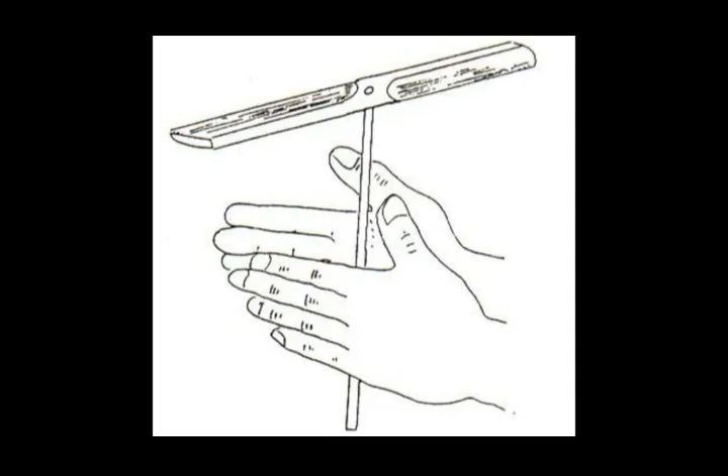Some kites in China and Japan were capable of carrying a man into the air. The ancient Chinese also flew small hot air lanterns and bamboo copter toys with spinning rotors. Leonardo da Vinci's 15th century dream of flight found expression in several rational but unscientific designs, though he did not attempt to construct any of them.

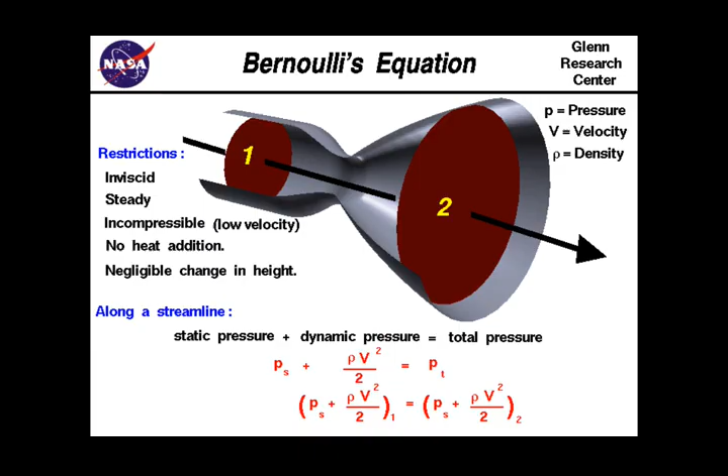The discovery of hydrogen gas in the 18th century led to the invention of the hydrogen balloon, at almost exactly the same time that the Montgolfier brothers discovered the hot air balloon and began manned flights. Various theories in mechanics by physicists during the same time period, notably fluid dynamics and Newton's law of motion, led to the foundation of modern aerodynamics, most notably by Sir George Cayley.

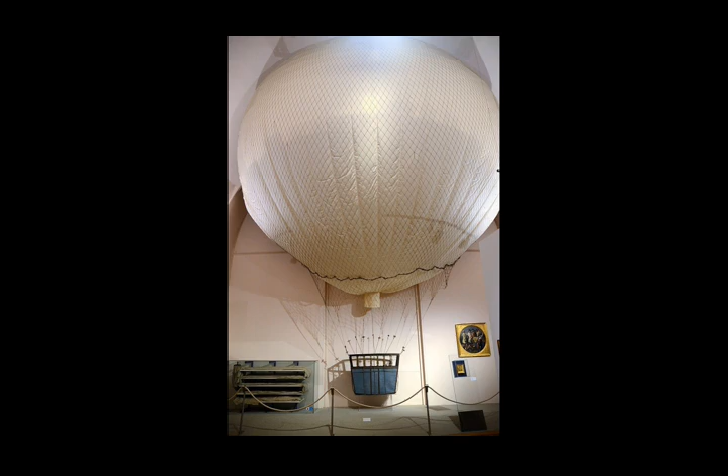Balloons, both free-flying and tethered, began to be used for military purposes from the end of the 18th century, with the French government establishing balloon companies during the Revolution. The term aviation, noun of action, from stem of Latin avis, bird, was coined in 1863 by French pioneer Guillaume Joseph Gabriel de la Landelle, 1812 to 1886, en navigation aérienne.

Experiments with gliders provided the groundwork for heavier-than-air craft, and by the early 20th century, advances in engine technology and aerodynamics made controlled powered flights possible for the first time. The modern airplane, with its characteristic tail, was established by 1909, and from then on, the history of the aeroplane became tied to the development of more and more powerful engines.

The first great ships of the air were the rigid dirigible balloons pioneered by Zeppelin, which soon became synonymous with airships and dominated long-distance flights until the 1930s, when large flying boats became popular. After World War II, the flying boats were in their turn replaced by land planes, and the new and immensely powerful jet engine revolutionized both air travel and military aviation.

In the latter part of the 20th century, the advent of digital electronics produced great advances in flight instrumentation and fly-by-wire systems. The 21st century saw the large-scale use of pilotless drones for military, civilian, and leisure use.

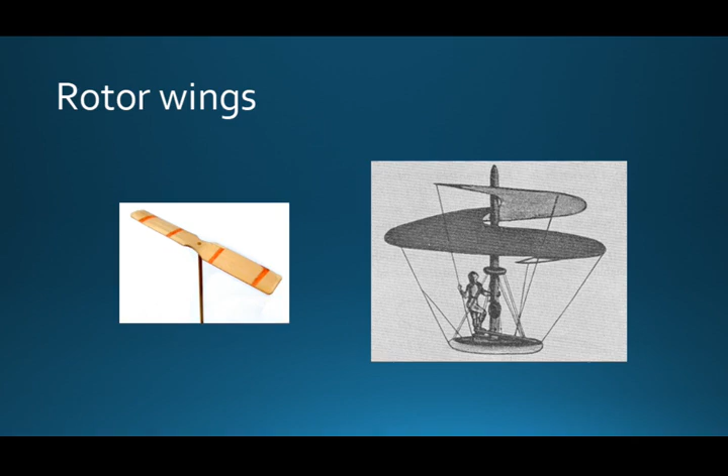The similar moulinet à noix, rotor on a nut, appeared in Europe in the 14th century AD.

Hot air balloons. A sky lantern. From ancient Chinese times, they have understood that hot air rises and have applied the principle to a type of small hot air balloon called the sky lantern. A sky lantern consists of a paper balloon under or just inside which a small lamp is placed. Sky lanterns are traditionally launched for pleasure and during festivals.

According to Joseph Needham, such lanterns were known in China from the 3rd century BC. Their military use is attributed to General Zhuge Liang, 180 to 234 AD, honorific title Kong Ming, who is said to have used them to scare the enemy troops. There is evidence that the Chinese also solved the problem of aerial navigation using balloons hundreds of years before the 18th century.

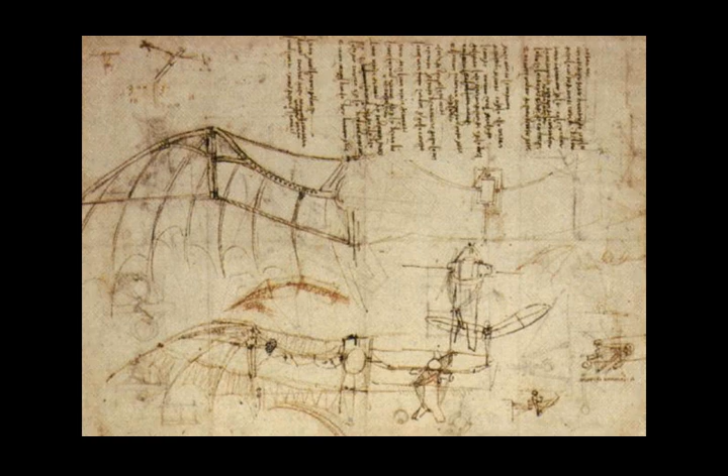Renaissance, one of Leonardo's sketches. Eventually, some investigators began to discover and define some of the basics of rational aircraft design. Most notable of these was Leonardo da Vinci, although his work remained unknown until 1797, and so had no influence on developments over the next 300 years. While his designs were at least rational, they were not based on any particularly good science.

Leonardo studied bird flight, analyzing it and anticipating many principles of aerodynamics. He did at least understand that an object offers as much resistance to the air as the air does to the object. Newton would not publish the third law of motion until 1687.

From the last years of the 15th century on, he wrote about and sketched many designs for flying machines and mechanisms, including ornithopters, fixed-wing gliders, rotorcraft, and parachutes. His early designs were man-powered types, including ornithopters and rotorcraft. However, he came to realize the impracticality of this and later turned to controlled gliding flights, also sketching some designs powered by a spring.

Lighter than air. Beginnings of modern theory. In 1670, Francesco Lana de Terzi published a work that suggested lighter than air flight would be possible by using copper foil spheres that, containing a vacuum, would be lighter than the displaced air to lift an airship. While theoretically sound, his design was not feasible. The pressure of the surrounding air would crush the spheres. The idea of using vacuum to produce lift is now known as vacuum airship, but remains unfeasible with any current materials.

In 1709, Bartolomeu de Gusmão presented a petition to King John V of Portugal, begging for his support for his invention of an airship, in which he expressed the greatest confidence. The public test of the machine, which was set for June 24, 1709, did not take place.

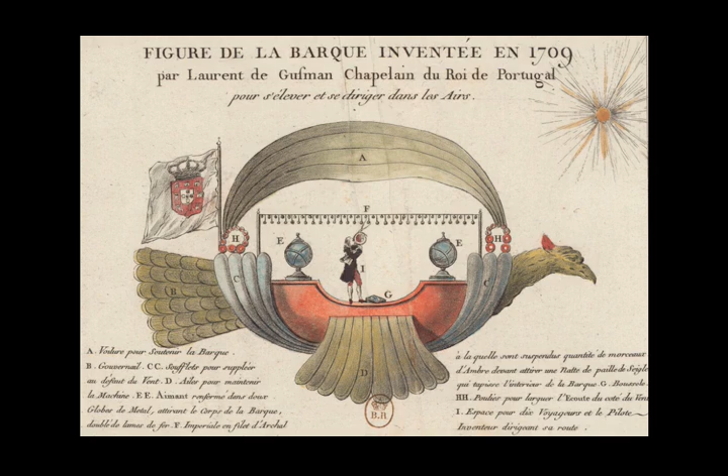According to contemporary reports, however, Gusmão appears to have made several less ambitious experiments with this machine, descending from eminences. It is certain that Gusmão was working on this principle at the public exhibition he gave before the court on August 8, 1709 in the hall of the Casa da India in Lisbon, when he propelled a ball to the roof by combustion.

Balloons. 1783 was a watershed year for ballooning and aviation. Between June 4th and December 1st, 5 aviation firsts were achieved in France. On the 4th of June, the Montgolfier brothers demonstrated an unmanned hot air balloon at Annonay, France. On 27th August, Jacques Charles and the Robert brothers, Les Frères Robert, launched the world's first unmanned hydrogen-filled balloon from the Champ de Mars, Paris.

On 19th October, the Montgolfier brothers launched the first manned flight, a tethered balloon with humans on board, at the Folie Titon in Paris. The aviators were the scientist Jean-François Pilâtre de Rozier, manufacture manager Jean-Baptiste Réveillon, and Giroud de Villette. On 21st November, the Montgolfier brothers launched the first free flight with humans as passengers.

King Louis XVI had originally decreed that condemned criminals would be the first pilots, but Jean-François Pilâtre de Rozier, along with Marquis François d'Arlandes, successfully petitioned for the honor. They drifted 8 kilometers, or 5 miles, in a balloon powered by a wood fire.

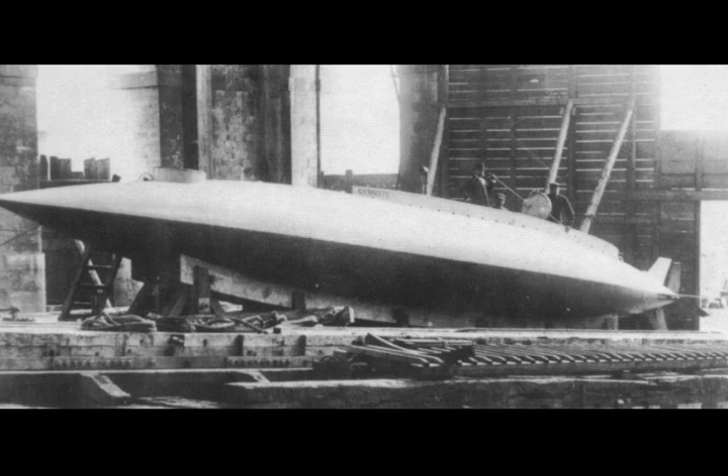However, these aircraft were generally short-lived and extremely frail. Routine controlled flights would not occur until the advent of the internal combustion engine. The first aircraft to make routine controlled flights were non-rigid airships, sometimes called blimps. The most successful early pioneering pilot of this type of aircraft was the Brazilian Alberto Santos Dumont, who effectively combined a balloon with an internal combustion engine.

On 19th October 1901, he flew his airship, No. 6, over Paris from the Parc de Saint-Cloud around the Eiffel Tower and back in under 30 minutes to win the Deutsch de la Meurthe Prize. Santos Dumont went on to design and build several aircraft. Subsequent controversies surrounding his and others' competing claims with regard to aircraft overshadowed his great contribution to the development of airships.

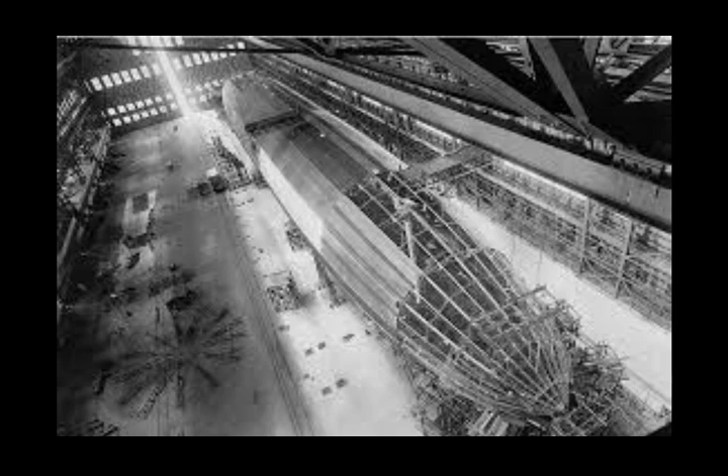At the same time that non-rigid airships were starting to have some success, the first successful rigid airships were also being developed. These would be far more capable than fixed-wing aircraft in terms of pure cargo carrying capacity for decades. Rigid airship design and advancement was pioneered by the German Count Ferdinand von Zeppelin.

Construction of the first Zeppelin airship began in 1899 in a floating assembly hall on Lake Constance in the Bay of Manzell, Friedrichshafen. This was intended to ease the starting procedure, as the hull could easily be aligned with the wind. The prototype airship LZ-1, LZ for Luftschiff Zeppelin, had a length of 128 meters or 420 feet, was driven by two 10.6 kilowatt or 14.2 horsepower Daimler engines and balanced by moving a weight between its two nacelles.

Its first flight on July 2nd, 1900 lasted for only 18 minutes, as LZ-1 was forced to land on the lake after the winding mechanism for the balancing weight had broken. Upon repair, the technology proved its potential in subsequent flights, bettering the 6 meters per second speed attained by the French airship La France by 3 meters per second, but could not yet convince possible investors. It would be several years before the Count was able to raise enough funds for another try.

Although airships were used both in World War I and II and continue on a limited basis to this day, their development was largely overshadowed by heavier than air craft. Heavier than air. The 17th and 18th centuries.

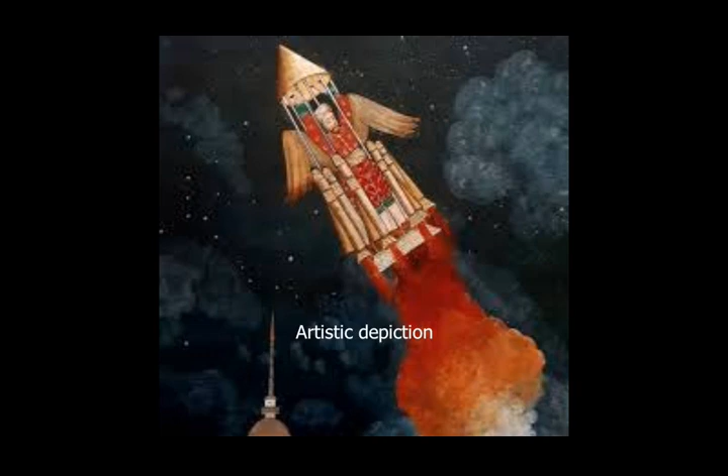Traveler Evliya Celebi reported that in 1633, Ottoman scientist and engineer Lagari Hasan Celebi blasted off from Sarayburnu in a 7-winged rocket propelled by 50 oka, 140 pounds, of gunpowder. The flight was said to have been undertaken at the time of the birth of Sultan Murad IV's daughter. As Evliya Celebi wrote, Lagari proclaimed before launching his craft, "Oh, my Sultan, be blessed. I am going to talk to Jesus."

After ascending in the rocket, he landed in the sea, swimming ashore and joking, "Oh, my Sultan, Jesus sends his regards to you." He was rewarded by the Sultan with silver and the rank of Sipahi in the Ottoman army. Evliya Celebi also wrote of Lagari's brother, Hezarfen Ahmed Celebi, making a flight by glider a year earlier.

Italian inventor Tito Livio Burattini, invited by the Polish king Ladislaw IV to his court in Warsaw, built a model aircraft with 4 fixed glider wings in 1647. Described as 4 pairs of wings attached to an elaborate dragon, it was said to have successfully lifted a cat in 1648, but not Burattini himself.

He promised that only the most minor injuries would result from landing the craft. His Dragon Volant is considered the most elaborate and sophisticated aeroplane to be built before the 19th century.

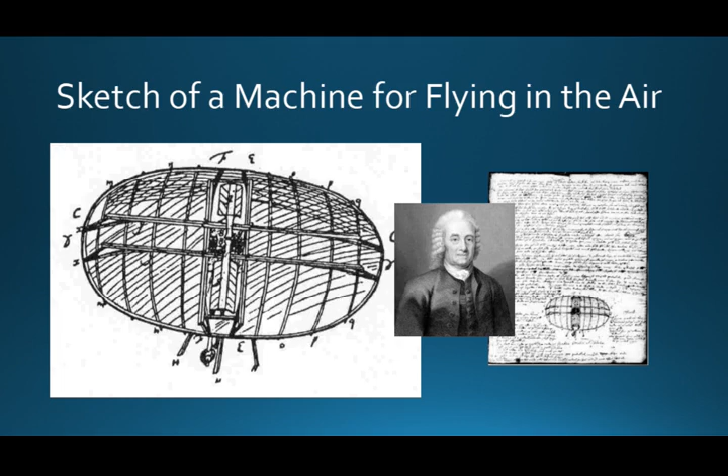Sketch of a machine for flying in the air. The first published paper on aviation was Sketch of a Machine for Flying in the Air by Emanuel Swedenborg, published in 1716. This flying machine consisted of a light frame covered with strong canvas and provided with 2 large oars or wings moving on a horizontal axis, arranged so that the upstroke met with no resistance while the downstroke provided

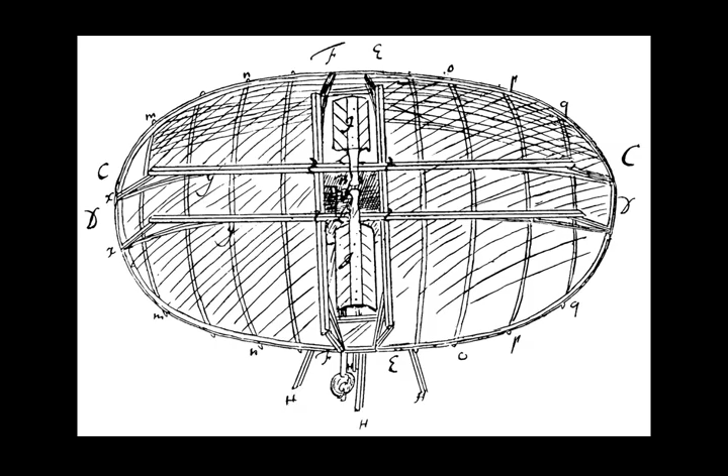lifting power. Swedenborg knew that the machine would not fly, but suggested it as a start and was confident that the problem would be solved. He wrote, "It seems easier to talk of such machine than to put it into actuality, but it requires greater force and less weight than exists in a human body. The science of mechanics might perhaps suggest a means, namely a strong spiral spring.

If these advantages and requisites are observed, perhaps in time to come someone might know how better to utilize our sketch and cause some addition to be made so as to accomplish that which we can only suggest. Yet there are sufficient proofs and examples from nature that such flights can take place without danger, although when the first trials are made, you may have to pay for the experience and not mind an arm or leg."

Swedenborg would prove prescient in his observation that a method of powering an aircraft was one of the critical problems to overcome. The 19th century. Throughout the 19th century, tower jumping was replaced by the equally fatal but equally popular balloon jumping as a way to demonstrate the continued uselessness of manpower and flapping wings. Meanwhile, the scientific study of heavier-than-air flight began in earnest.

Sir George Cayley and the first modern aircraft. Sir George Cayley was first called the father of the aeroplane in 1846. During the last years of the previous century, he had begun the first rigorous study of the physics of flight and would later design the first modern heavier-than-air craft.

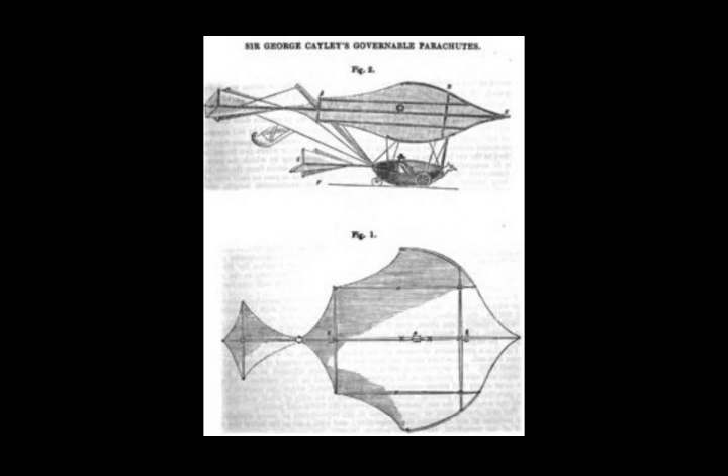In 1804, Cayley constructed a model glider, which was the first modern heavier-than-air flying machine, having the layout of a conventional modern aircraft with an inclined wing towards the front and adjustable tail at the back with both tailplane and fin. A movable weight allowed adjustment of the model's center of gravity.

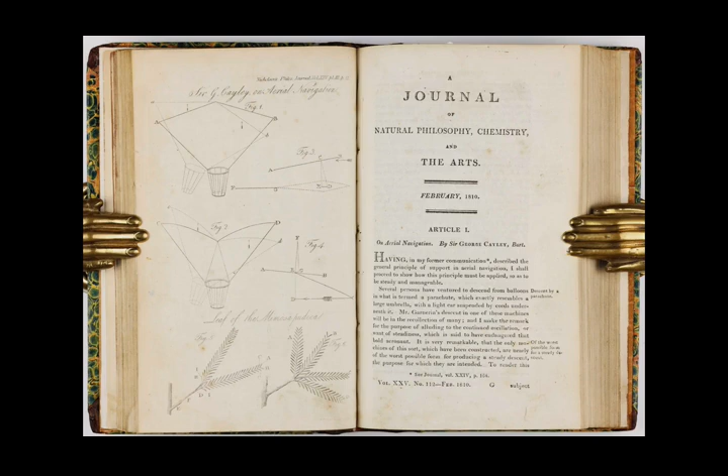The governable parachute design of 1852. In 1809, goaded by the farcical antics of his contemporaries, he began a publication of a landmark three-part treatise titled On Aerial Navigation, 1809 to 1810. In it, he wrote the first scientific statement of the problem: the whole problem is confined within these limits, viz., to make a surface support a given weight by the application of power to the resistance of air.

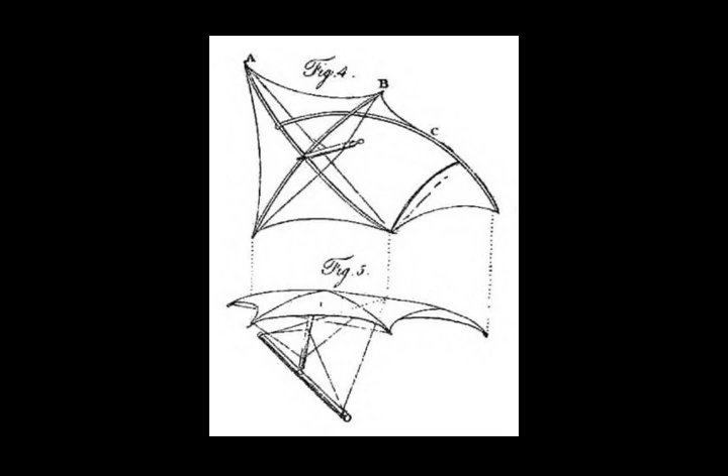He identified the four vector forces that influence an aircraft: thrust, lift, drag, and weight, and distinguished stability and control in his designs. He also identified and described the importance of the cambered aerofoil, dihedral, diagonal bracing, and drag reduction, and contributed to the understanding and design of ornithopters and parachutes.

In 1849, he had progressed far enough to construct a glider in the form of a triplane large and safe enough to carry a child. A local boy was chosen, but his name is not known. He went on to publish in 1852 the design for a full-size manned glider or governable parachute to be launched from a balloon, and then to construct a version capable of launching from the top of a hill, which carried the first adult aviator across Brompton Dale in 1853.

Minor inventions included the rubber-powered motor, which provided a reliable power source for research models. By 1808, he had even reinvented the wheel, devising the tension-spoked wheel, in which all compression loads are carried by the rim, allowing a lightweight undercarriage.

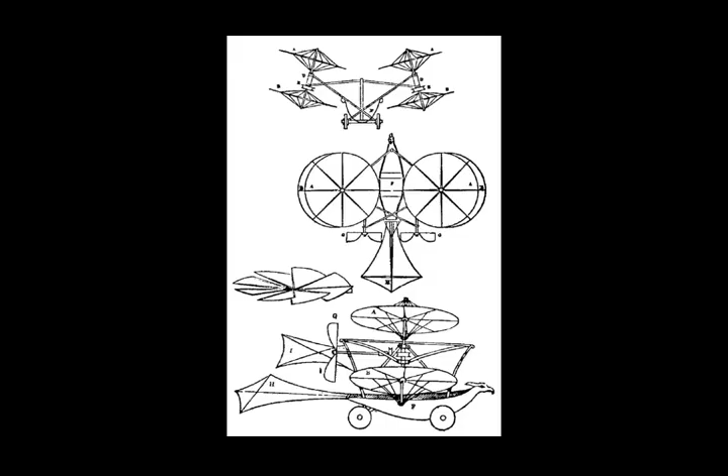The Age of Steam. Drawing directly from Cayley's work, Henson's 1842 design for an aerial steam carriage broke new ground. Although only a design, it was the first in history for a propeller-driven fixed-wing aircraft.

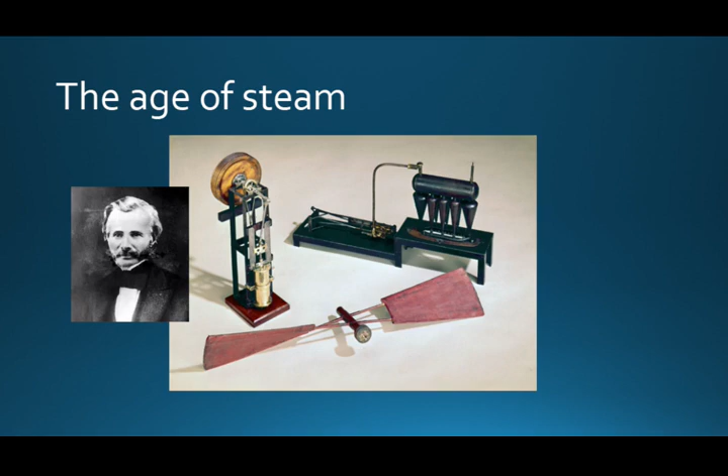In 1866, the founding of the Aeronautical Society of Great Britain, and 2 years later, the world's first aeronautical exhibition was held at the Crystal Palace, London, where John Stringfellow was awarded a £100 prize for the steam engine with the best power-to-weight ratio. Francis Herbert Wenham presented the first paper to the newly formed Aeronautical Society, later the Royal Aeronautical Society, on aerial locomotion. He advanced Cayley's work on cambered wings, making important findings.

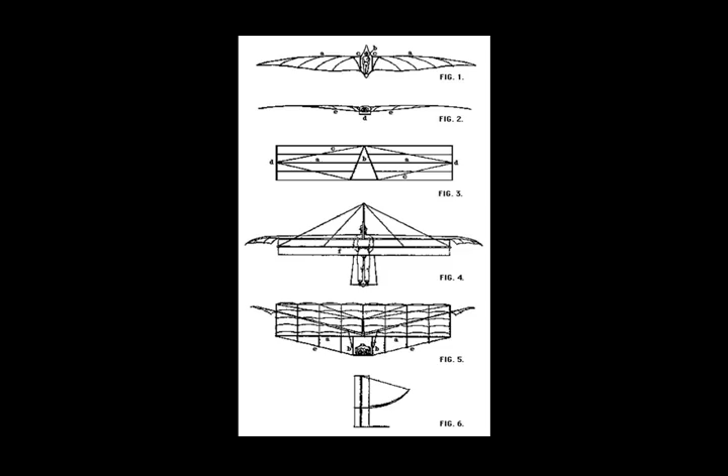To test his ideas, from 1858 he had constructed several gliders, both manned and unmanned, and with up to 5 stacked wings. He realized that long, thin wings are better than bat-like ones because they have more leading edge for the area. Today, this relationship is known as the aspect ratio of a wing.

The latter part of the 19th century became a period of intense study, characterized by the gentlemen scientists who represented most research efforts until the 20th century. Among them was the British scientist, philosopher, and inventor Matthew Piers Watt Boulton, who studied lateral flight control and was the first to patent an aileron control system in 1868. In 1871, Wenham and Browning made the first wind tunnel.

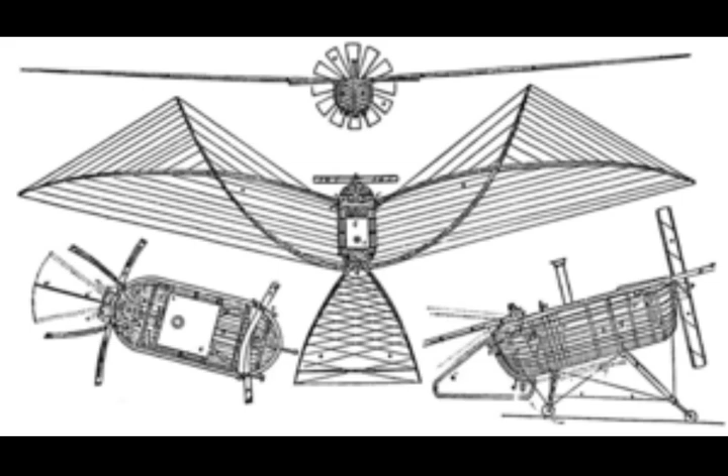Felix du Temple's 1874 monoplane, shown in the picture in the center. Meanwhile, the British advances had galvanized French researchers. In 1857, Felix du Temple proposed a monoplane with a tail plane and retractable undercarriage, developing his ideas with a model powered first by clockwork and later by steam. He eventually achieved a short hop with a full-sized manned aircraft in 1874.

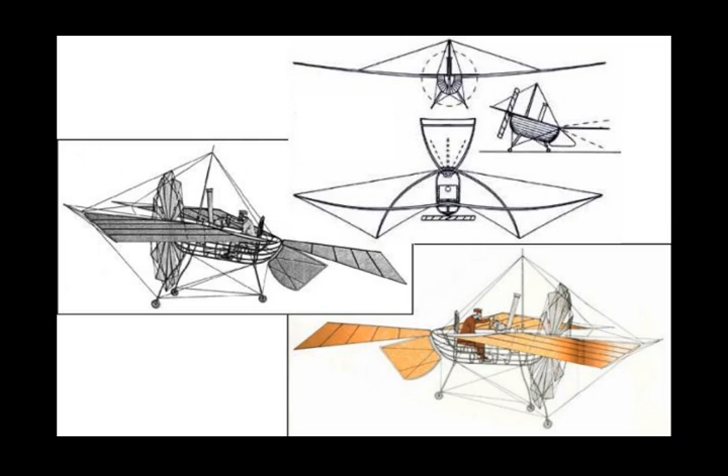The monoplane. In 1874, the two brothers built the monoplane, a large plane made of aluminum in Brest, France, with a wingspan of 13 meters and a weight of only 80 kilograms without the pilot. Several trials were made with the plane, and it is generally recognized that it achieved liftoff under its own power after a ski jump run, glided for a short time, and returned safely to ground, possibly making it the first successful powered flight in history, depending on the definition, since the flight was only a short distance and a short time. The plane was displayed at the 1878 World Fair, Exposition Universelle 1878 in Paris.

In 1856, Frenchman Jean-Marie Le Bris made the first flight higher than his point of departure by having his glider, l'Albatros Artificiel, pulled by a horse on a beach. He reportedly achieved a height of 100 meters over a distance of 200 meters.

Pénaud's model incorporated several of Cayley's discoveries, including the use of a tail, wing dihedral for inherent stability, and rubber power. The Planophore also had longitudinal stability, being trimmed such that the tailplane was set at a smaller angle of incidence than the wings, an original and important contribution to the theory of aeronautics.

Pénaud's later project for an amphibian aeroplane, although never built, incorporated other modern features: a tailless monoplane with a single vertical fin and twin tractor propellers. It also featured hinged rear elevator and rudder surfaces, retractable undercarriage, and a fully enclosed instrumented cockpit.

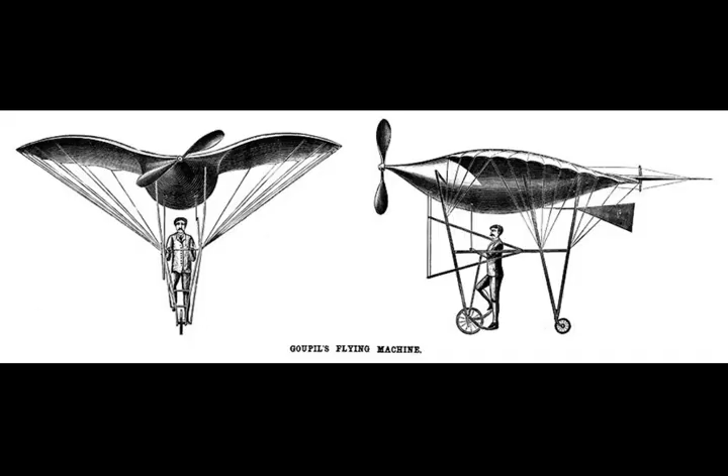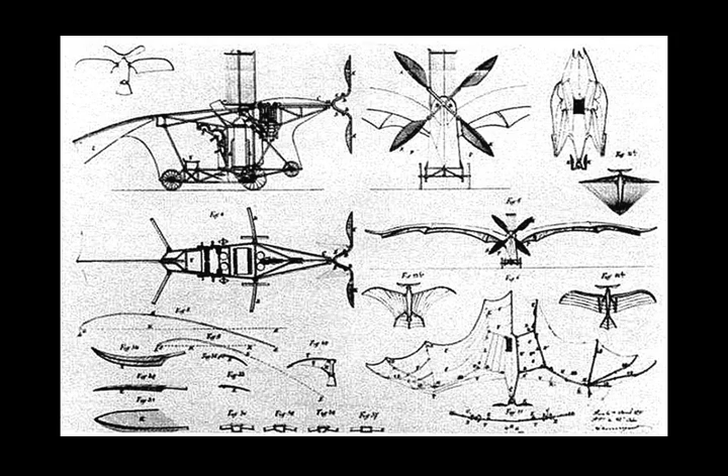His Avion 3 in 1897, notable only for having twin steam engines, failed to fly. Ader would later claim his success and was not debunked until 1910, when the French Army published its report on his attempt.

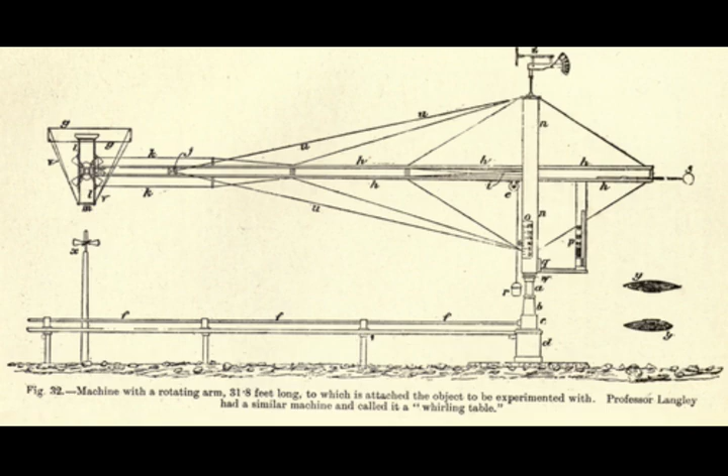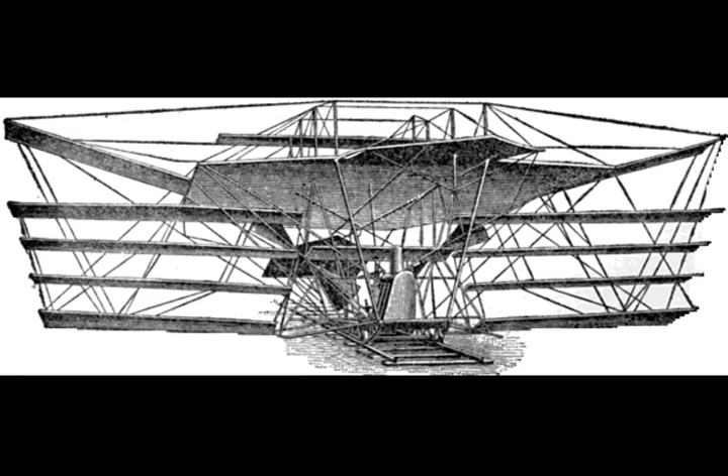Sir Hiram Maxim was an American engineer who had moved to England. He built his own whirling arm rig and wind tunnel, and constructed a large machine with a wingspan of about 105 feet, 32 meters, a length of 145 feet, 44 meters, fore and aft horizontal surfaces, and a crew of 3. Twin propellers were powered by two lightweight compound steam engines, each delivering 180 horsepower or 130 kilowatts. Overall weight was 8,000 pounds, 3,600 kilograms.

It was intended as a test rig to investigate aerodynamic lift. Lacking flight controls, it ran on rails with a second set of rails above the wheels to restrain it. Completed in 1894, on its third run, it broke from the rail, became airborne for several hundred feet at 2 to 3 feet altitude, and was badly damaged upon falling back to the ground. It was subsequently repaired, but Maxim abandoned his experiments shortly afterwards.

Learning to glide. The Biot-Massia glider, restored and on display at the Musée de l'Air. In the last decade or so of the 19th century, a number of key figures were refining and defining the modern airplane. Lacking a suitable engine, aircraft work focused on stability and control of gliding flight. In 1879, Biot constructed a bird-like glider with the help of Massia and flew it briefly. It is preserved in the Musée de l'Air, France, and is claimed to be the earliest man-carrying flying machine still in existence.

The Englishman Horatio Phillips made key contributions to aerodynamics. He conducted extensive wind tunnel research on aerofoil sections, proving the principles of aerodynamic lift foreseen by Cayley and Wenham. His findings underpin all modern aerofoil design.

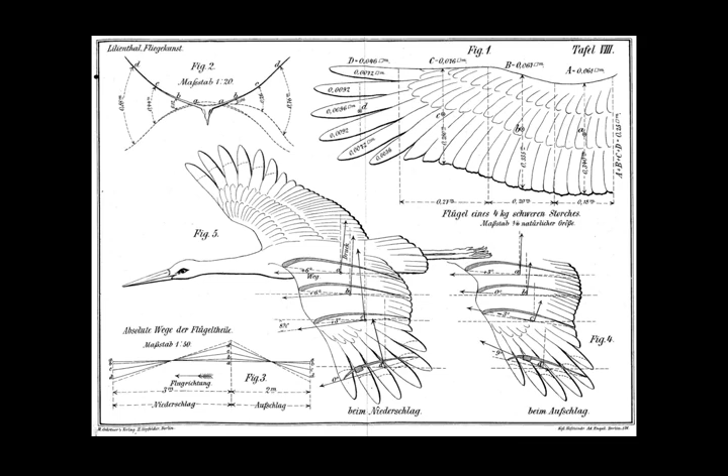Stimulating interest around the world, he rigorously documented his work, including photographs, and for this reason is one of the best known of the early pioneers. Lilienthal made over 2,000 glides until his death in 1896 from injuries sustained in a glider crash.

Picking up where Lilienthal left off, Octave Chanute took up aircraft design after an early retirement. He funded the development of several gliders. In the summer of 1896, his team flew several of their designs, eventually deciding that the best was a biplane design. Like Lilienthal, he documented and photographed his work.

In Britain, Percy Pilcher, who had worked for Maxim, built and successfully flew several gliders during the mid to late 1890s. The invention of the box kite during this period by the Australian Lawrence Hargrave would lead to the development of the practical biplane. In 1894, Hargrave linked 4 of his kites together, added a sling seat, and flew 16 feet or 4.9 meters. Later pioneers of manned kite flying included Samuel Franklin Cody in England and Captain Génie Saconney in France.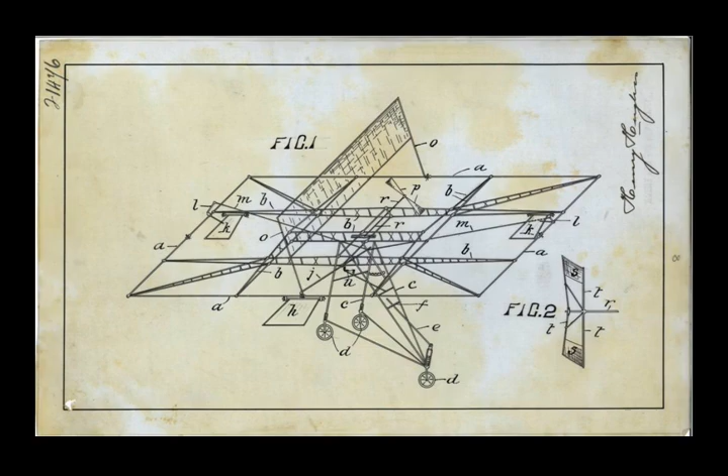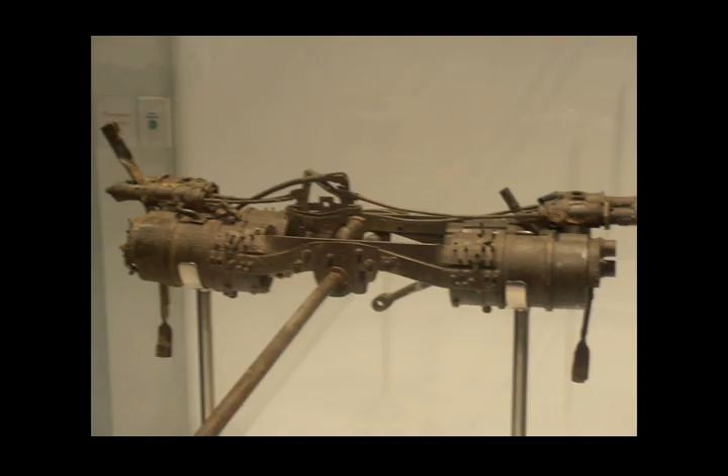Pearce. Richard Pearce was a New Zealand farmer and inventor who performed pioneering aviation experiments. Witnesses interviewed many years afterward claimed that Pearce flew and landed a powered heavier-than-air machine on 31st March 1903, 9 months before the Wright brothers flew. Documentary evidence for these claims remains open to interpretation and dispute, and Pearce himself never made such claims. In a newspaper interview in 1909, he said he did not attempt anything practical until 1904. If he did fly in 1903, the flight appears to have been poorly controlled in comparison to the Wrights.